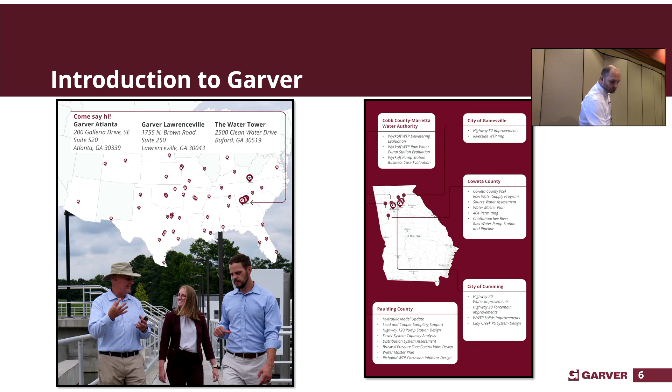First, we're going to talk a little bit about how Metro Atlanta developed relative to water. We're just going to talk about the water things. I got a lot of stories.

Most of this stuff comes from Franklin Garrett's Atlanta and Environs book. Anybody here familiar with that book? Franklin Garrett was a historian for a really, really long time in Atlanta. The books are long and crazy, but during COVID, UGA opened up their entire library so you could download things. So what I did is I downloaded both volumes of the book, put it inside of a PDF, and then did control find for everything related to water, wastewater, and supply, and went through and chronicled the different history of what was going on inside of Atlanta.

Additionally, there's another book floating around here that I've left sitting somewhere, called Thirsty City. I wanted to share it. I do not have an actual physical copy of Atlanta and Environs because it's huge and expensive, but I do have this. This is Thirsty City. I would also recommend this book. Pretty good. So I'm taking a lot of the history out of those two books.

These are not things that I went and read the archives for myself. So I just want to be really clear that all I'm doing is presenting information that I think is interesting, that might give you a little bit more context the next time you're watching the news about what's going on in the city or in the North Georgia area when it's related to water.

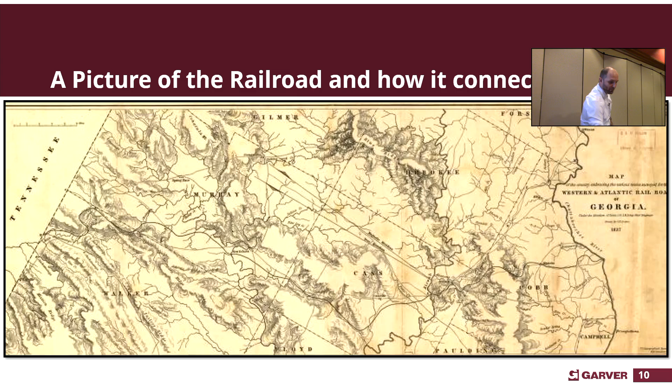You can't see this at all on this map, but this is actually the original Western and Atlantic Railroad, and here is Atlanta on the Chattahoochee, where they were going to a ferry location, a common ferry location on the Chattahoochee. Up there is actually Tennessee. And there's a whole bunch of counties I was going to show you as well.

So, jumping into Atlanta and its environs, a chronicle of its people and events. It was published in 1954, and then volume 2 was published in 1969.

In the 1850s, Atlanta's water source was artesian wells, located adjacent to Five Points — not Little Five Points, but Five Points downtown. And what is an artesian well? It means you could shove a pipe in the ground and the water will go upward, because there's pressure underneath the ground that forces the water up.

That's a great solution for maybe 100,000 people. I don't know the safe yield, but it sure isn't a solution for 1 million people. So it was only a short period of time before they started thinking about it.

So between 1850 and 1875, there was a lot of conversation inside Atlanta City Hall about privatization. Sound familiar? We're going to talk a little bit about what happened with Bill Campbell and all the stuff with privatization in Atlanta. These things rhyme and repeat.

They fought for many years about how it was going to work. Should they do the Atlanta Works? There was actually a canal company established that was going to try to dredge and bring in water from different areas because they knew it was a water issue. Eventually, the city council came together and decided there was going to be a new water source, and they were going to do it on the South River.

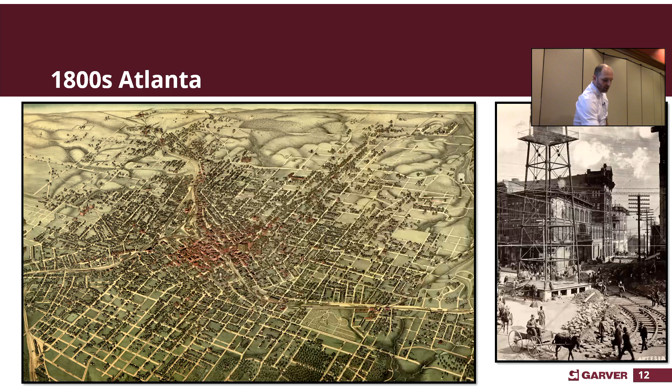Inside Franklin Garrett's book, he lists that Atlanta Waterworks' headquarters was actually located at South River Water Reclamation Facility - that was the original location. There's definitely conflicting reports out there about where the original one was. Some people have reported it's Hemphill, but Atlanta Waterworks was established prior to Hemphill, so I don't know.

But I do know this - I was there starting up the digesters while I was at South River, and this is the original house that the plant manager for South River actually lived in. Back in the day, that's where the plant managers would actually live, at the places they worked.

In fact, Clayton County still has original houses near one of their plants, and they still rent those out to their operators who operate the plants, because they have to be available.

I'll stop right here to say, if you don't know too much about water and wastewater - I love our linemen that get up and fix the power when it goes out, but you probably haven't thought about the water operators that deliver your clean water whenever things go bad, and the wastewater operators that keep our rivers clean. We do a lot to recognize our operators, but two Christmases ago when we had that freeze, those ladies and gentlemen worked basically from Christmas past New Year's, finding all the breaks and trying to keep your water online so you could enjoy your holiday season.

They really do love the fact that you don't think about your water. That's the kind of people our water and wastewater operators are, and it's a really special thing. We should be celebrating them more as a society, but that's okay.

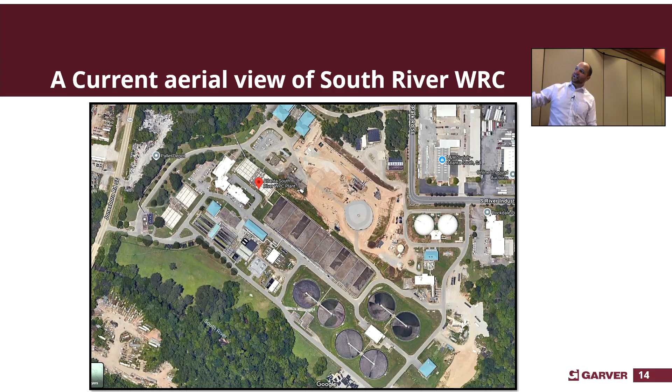This is that original building they lived in, and unfortunately it's been demolished, so you can't see it too well here. But this is actually a new primary clarifier being constructed for the wastewater treatment facility at South River, and it actually recently got demolished. So this history goes away if we don't make an effort to preserve it.

So in this area right over here, you're seeing Druid Hills, right? And what's in Druid Hills? What famous university? Does anybody know who was on the board for Emory University when it was established, who has a famous last name in Atlanta? Asa Candler - his son was on the board when they established Emory University.

Asa Candler's family was all living in the Druid Hills area, which is near the headwaters of Peachtree Creek, a very famous area. Another fun story about Atlanta - they had an exotic zoo down by the bottom, if you've ever been in the atrium area of Emory, and they moved all those animals to Grant Park, which actually became Zoo Atlanta.

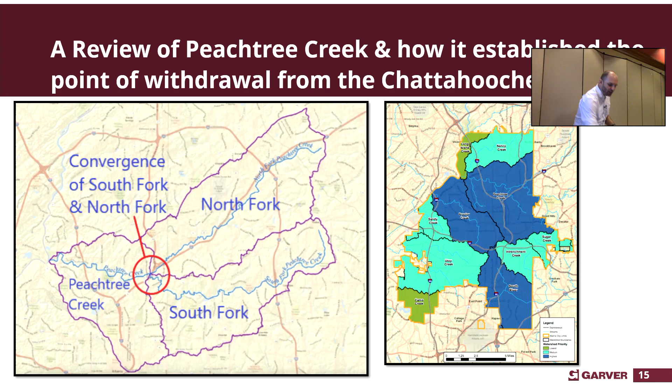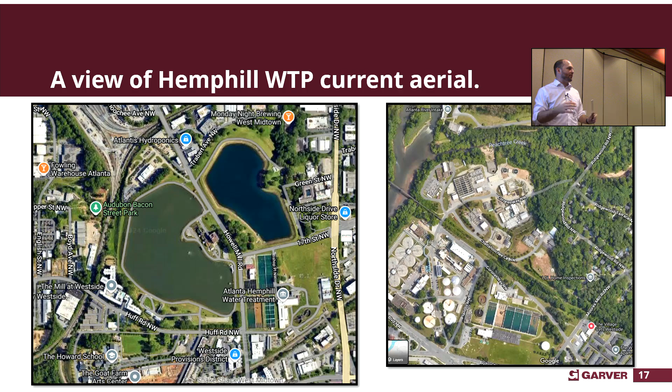This is a massive complex full of all kinds of treatment. So this right here is the wastewater treatment plant. You've got the water treatment plant here. This is the Chattahoochee water treatment plant. You have Cobb County assets. You have City of Atlanta assets. This is just a really important spot that has established over the last 100 years for a lot of water-related items inside of the City of Atlanta.

So continuing on with Atlanta and its environs, in the early 1900s, wastewater ditches to Imhoff tanks. So we talk about this a lot, and it still is a real thing today as we go out into new areas and develop. It's called the water sewer lag.

Anybody heard of that? Okay, water is revenue. So the government has a direct incentive to add customers on the water side, right? You have a direct incentive to build infrastructure to deliver water because those are customers. Customers are great because they pay bills, but they're also really important for bonding. So if you have customers that you can spread the cost of any capital projects or things like that, it's very important for bonding.

You have to think of governments from a funding standpoint different than a person. You don't have to, actually. You can think whatever you want to think. I think that you should think of government's finances different than a person. So when I hear somebody say balance the budget, well, sorry, governments don't die. Well, they do eventually, but hopefully thousands of years later.

Guess what they also do? They don't retire. They don't have to prepare for retirement. They need debt. They need debt to operate, to keep the system moving, because if you built the Chattahoochee pump station right now -- that they built in 1953 for Cobb County Marietta Water Authority, which was $2 million -- it would be $70 million. So with inflation and things moving, you must keep investing in infrastructure along the way, or you're going to end yourself in problems just like what we're talking about.

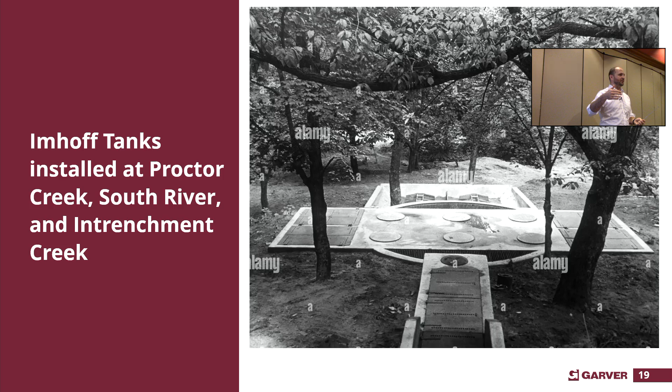This is a view of an Imhoff tank - not one in the city of Atlanta, but it gives you a sense of what they would have looked like below grade. They had Imhoff tanks at Proctor Creek, which you've probably heard of on the west side of Atlanta, very impacted by impervious surface; at South River, which we talked about a minute ago; and at Intrenchment Creek. South River and Intrenchment Creek ended up becoming combined sewer overflow locations, or CSOs, and Intrenchment Creek has recently been upgraded further, sending the wastewater to different areas, but I'll talk about that in a minute.

There are no known pictures of the street party, but in 1918 they had a party on Peachtree. They hung flags 100 feet in the air, all down Peachtree from Auburn Avenue to 12th, something around there, and had a party on Peachtree. They turned on the pumps and shot water up in the air, celebrating that Atlanta would never burn down again, in a year and a half's time. Once they had that capacity, the water system started spreading everywhere throughout the city of Atlanta in a major way.

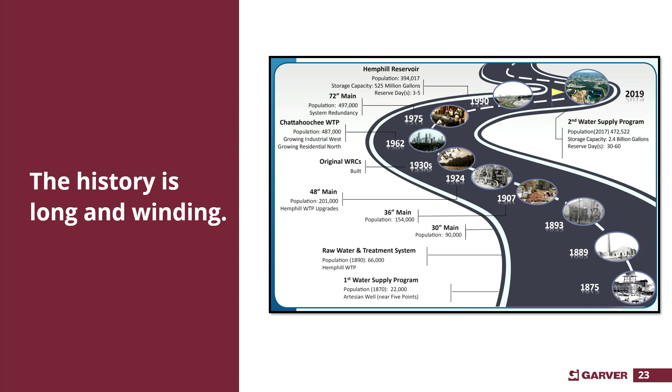South River, the headwaters of which are actually located under the Delta airport right now — there's a whole podcast called Finding the Flint that is spectacular, and there's a whole bunch of people doing a lot of work inside the city related to that.

One of the fun stories I'll tell about interbasin transfer and that original era: there was a plant put down at the airport called the Flint wastewater treatment plant, and it expanded into the 1960s. It had Venturi pumps.

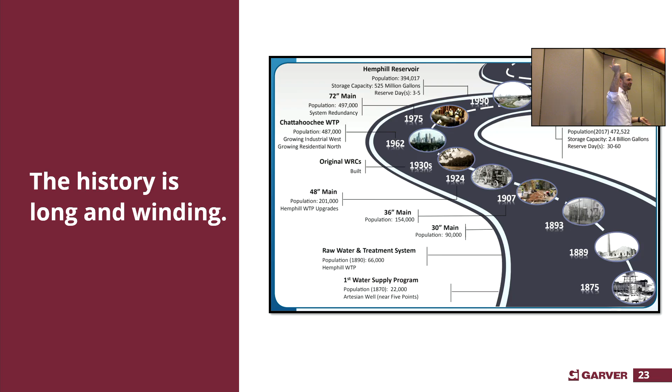Anybody familiar with what a Venturi is, from Bernoulli's equation? If flow is moving fast, the pressure goes down — I tried to trick y'all. One of the cool things about a Venturi tube is it recovers its head, it recovers its pressure loss. When you neck down, the outer neck is designed to have the least amount of head loss possible. What that also means is if you start a Venturi, it's a self-priming thing and will continue. So they actually had original Venturi pumps all over this wastewater treatment plant, because they didn't want much mechanical equipment inside their plants.

Who's the number one water user in the country?

The power industry - who's the number one power user in the country? The water industry. Our blowers at wastewater treatment facilities, the pumps for water, are just sucking power all the time. That's why most of them are generally public good utilities, because they're inextricably connected in a major way.

That's why we work so closely with them, with our intakes and all those other things. But when interbasin transfer came along, they had to shut that entire wastewater treatment plant down in the 1970s. And those Venturi pumps I was talking about work great unless it's wastewater. Those things would mess up all the time. There's all kinds of stories about it - it just didn't really work right.

Engineers having great ideas on paper, right? A little bit harder to apply. Now there's a force main that sends the water all the way up to South River, and I'll explain that on the next one.

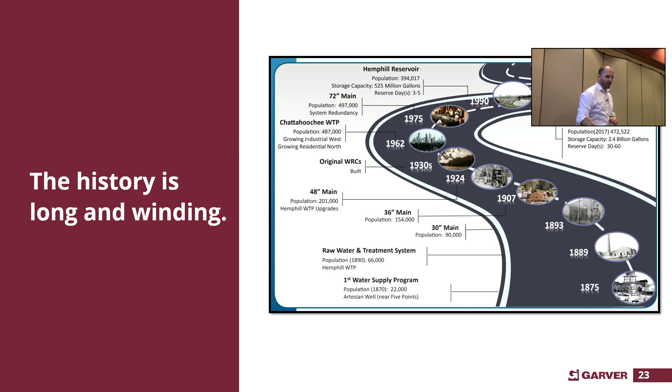We're going to talk a little bit more at the end about some of the challenges going on, but that's the big three - those three wastewater treatment plants - and a lot of the issues they're dealing with on the wastewater side of things. Because we're going to talk about the water, but the wastewater situation is not an insignificant thing that the city of Atlanta faces right now.

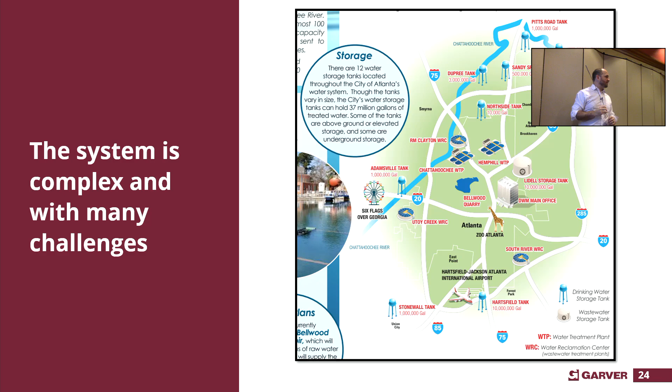This is the Hemphill Water Treatment Plant. Make sure I'm circling the right thing - I'm sorry, that is the Hemphill Water Treatment Plant. And so that is that pump station I was talking about that's really supplying most of Atlanta.

Well, when this main break occurred, it occurred in the early morning hours of that Friday, and they initially reported that it was at the intersection of three major transmission mains. Al Wiggins is the acting commissioner - I think he may be the official commissioner now. There's been a little bit of transition, but Mikita Browning was the previous commissioner that had left earlier this year.

So he was relatively new in the job, gets on the news, and they had made a decision that they were not going to shut everything down until 5 p.m. that afternoon, to give people time to plan. At the time, they didn't know how long the break or the repair was going to be, but they knew it was a significant situation in a significant area, and they told people there may be a boil water advisory.

I have the videos, but we're running out of time, so I don't want to go into every single one of them. But I think it's important.

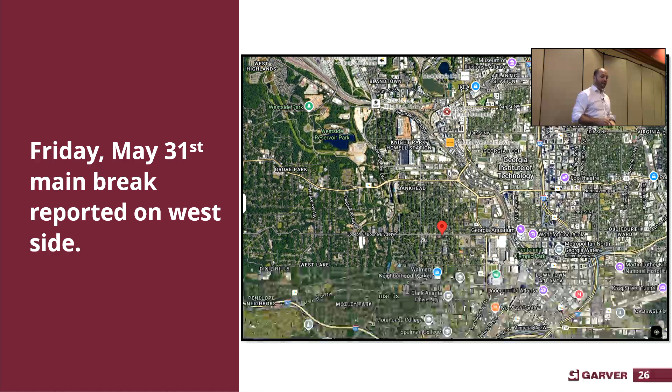So they started the repairs at 5 o'clock and proceeded through the night. In that time, there was another break on the west side. Sorry, my bad, let me back up. The situation was assessed prior to the repair, at the intersection of 3 major trunk lines that were 80 plus years old.

This was the original boil water impacted area, which was actually put out later. They did not put that out at the time of the break. Crews were mobilized. There were actually some crews sent home according to the interviews, and they prepared for 5 o'clock and then worked all overnight to assess the situation. Remember, they had to turn it off to even get in and see what happened before they could do anything.

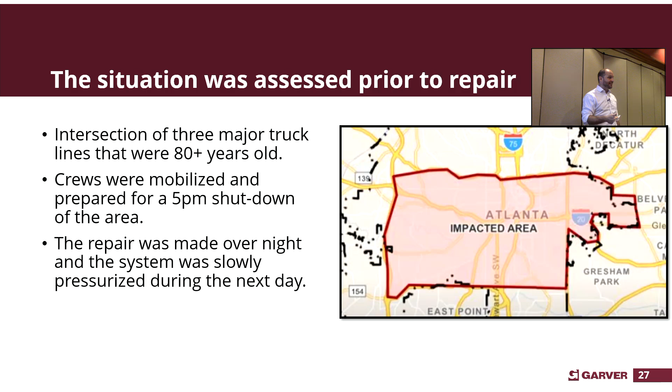Then the repair was made overnight, and the next day, Saturday morning, they started to repressurize the system in the area. But the public isn't so kind. That's not how things work for us sometimes as engineers.

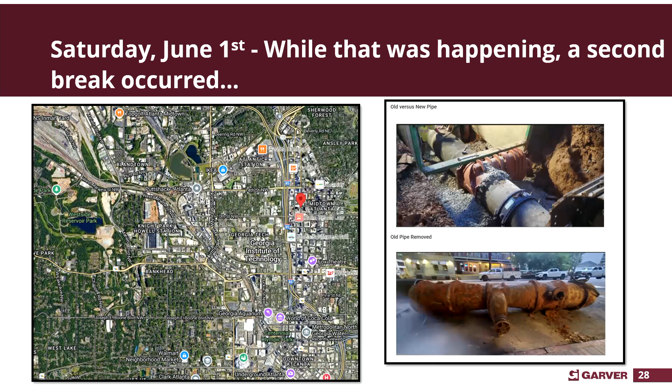So on Saturday, June 1st, while that was happening, a second break occurred overnight, right here with the red dot in the heart of Midtown. So this break happened and they repaired it. Unfortunately, another break happened, and as far as the news was concerned, it was all one huge compounding disaster.

This is actually a picture they posted later of the pipe that was pulled from the ground. It was over 80 years old. I doubt very seriously that gate valve was ever going to open — that's called a gate valve. And this is the repair of the area once completed.

Do you think it's possible that the lack of pressure and then repressurization may have contributed to this? Absolutely. You can't say definitely that it did, but you can say what happens when a system is pressurized and depressurized. I worked on the Richland Creek supply program in Paulding, where they switched from Cobb County, Marietta to Paulding water. We did a whole bunch of work on how the water was going to change directions, so we knew the most likely places for it to break. The interesting thing is when you pressurize and repressurize, the pipe moves in an opposite direction than it's moved for the last 80 years.

And that change of direction can cause a little bit of space next to the pipe, and what restrains a pipe in these old systems is the ground. We have new restrained joint fittings and special materials now — they didn't have that 80 years ago. They made a bell, shoved the pipe in, and put it under the ground, and it held the water. A lot of times they actually poured lead to seal it, and there are reports that's what they did from the original Chattahoochee intake to Hemphill. So it absolutely could have contributed, but you couldn't tell for certain.

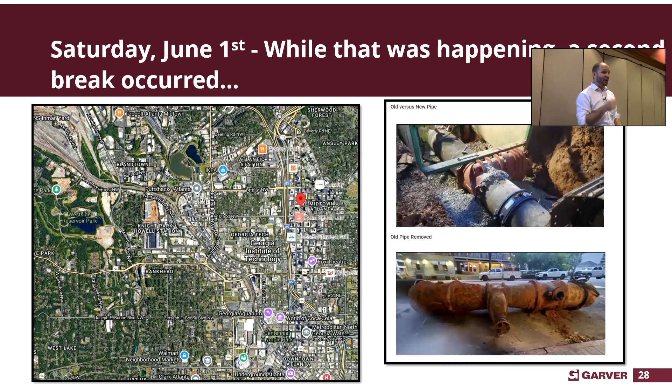And in that time period, they had other breaks. The City of Atlanta's got breaks all the time — this is a 100-plus-year-old system. Breaks are happening continually. They have a lot of people working for the City of Atlanta too; a lot of people don't realize how big that organization truly is, and how many things there are to handle.

Then moving into Sunday, June 2nd, they started draining the lines in this area. They got this repair done relatively quickly, from what I know, but this area challenged them. From all the reports they put out, the issue was they couldn't isolate it, because where this break happened there was a valve right there, and they couldn't get it isolated. So they spent a lot of time around the area trying to get it isolated on Sunday.

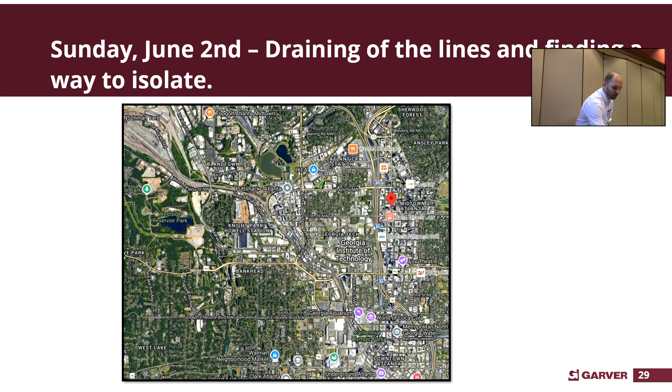By Monday morning, this is the actual zone for the boil water advisory. And this is a picture of the original boil water advisory I showed you, covering the multiple trunk lines — this is how much smaller it was on the second one. But again, news doesn't care, right? This is just selling papers at this point.

Everybody's paying attention these days in 2024. I'm telling you, my great-grandmother just came back to live with my mom and dad. She'll listen to anybody on YouTube, on the internet, the news and things. So I'm telling you, my generation in 2024, we don't trust nothing. You got to tell us, we got to see it from seven different sources. You really got to take that mentality. A lot of people in this room know this - we're professional engineers, this is what we do. Our stuff just gets turned on us from time to time.

But this was the case. They had reduced this down and they were attacking that break, and they ended up finding out that it was a part they didn't have, because it was a big older part. They actually had to have it brought in from Alabama. I think it was Birmingham Waterworks Board, because they also have big infrastructure like Atlanta does. They had police escort to bring that part back into Atlanta, and then Atlanta PD picked it up right when they hit their precinct to bring that thing in.

It gives me chills - I'm a water engineer through my core, and that's what this is. This is public health and the ability for people to do the things they need to do on the daily without thinking about their water. And if for a moment there, people recognized again how special that is, and really how fast it can be taken away, that's the other side.

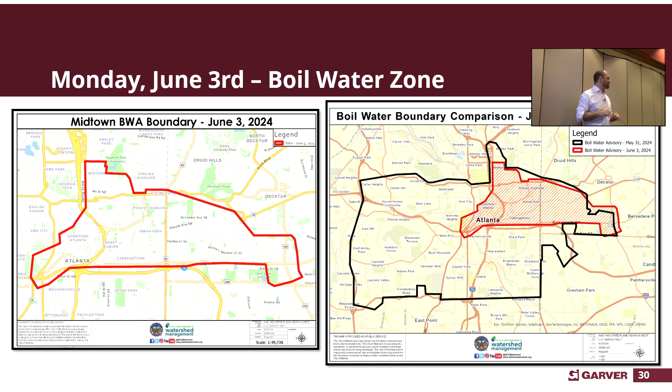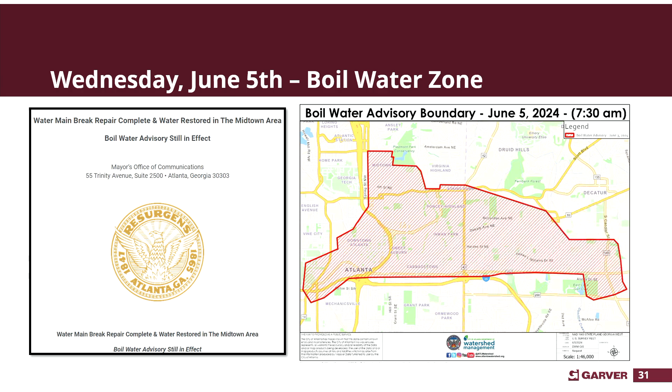Maybe not exactly what you thought you were gonna hear from the presentation today. I'm like, hey, it's cool that this happened - not exactly. City of Atlanta needs some things to work on for sure, but with all this, I just like to be honest about it.

So this is Wednesday as it's brought in - you have the same boil water zone. At this point they had gotten really good at communicating out to the public what's happening, while the news is eating it up and trying to blame it on somebody. But on Thursday, June 6th, the boil water was restored. City of Atlanta has since engaged with the U.S. Army Corps of Engineers.

I'm going to talk about my own opinions here - this is not something I know, but here's what I think is happening. They do assessments in Atlanta like all the time, it's just part of being a system that big. I think they do it too much, quite honestly. I'm a 'you looked at it, build it' kind of person. We got to replace the assets and quit analyzing it till the cows come home. There's a point that's good enough, and then replace it.

John's over here, I talk about this at Garver all the time - I don't want to hear 'okay, you analyze it, replace it.' That's fine, but that's the problem affecting our country right now, our state and our communities: we're over analyzing because we're scared to death to get sued. We gotta get the stuff fixed and revitalized in the ground, above ground, and everything else. It's deteriorating every day, and we gotta quit mulling it over.

So the U.S. Army Corps of Engineers was brought in. The last I heard was a $2 million contract to assess again. But here's the key of that - there's a lot of conversation going on right now in Georgia around where federal dollars are being spent.

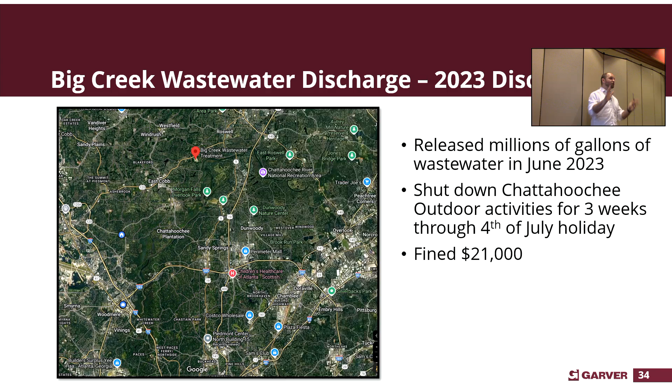So that was just last year in the summer. Then the Chattahoochee River Keeper discovered and documented a wastewater discharge from R.M. Clayton. R.M. Clayton is located right here - Big Creek was up in this area along the Chattahoochee River, and it flows that way through the city.

They informed the City of Atlanta of their monitoring results, and then in July of 2024 issued an intent to sue, which is required under the Clean Water Act, providing a 60-day notice for that intent to sue.

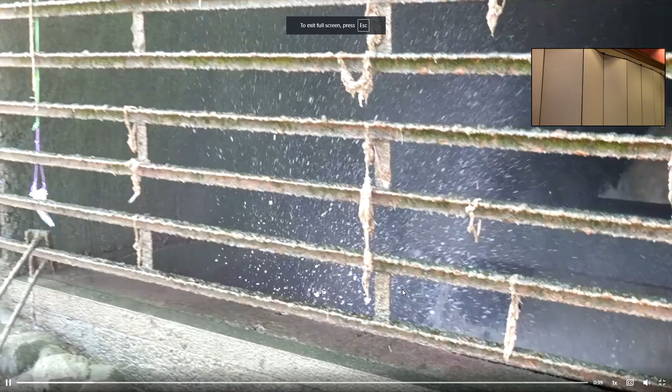This is the executive director of the Chattahoochee River Keeper. They have 300 people who volunteer to take samples, almost weekly or every single day. This is them at that discharge, documenting what they're seeing, right now just downstream of Atlanta Road, where RM... They have a really cool jet boat that allows them to get around the Chattahoochee. It actually goes back to Shirley Franklin, and there's a recent documentary, but look at this - 80 million gallons per day.

Unfortunately, we've had a lack of communication and cooperation from the city, and because of that, we just filed a lawsuit against the city of Atlanta, an intent to sue, holding them accountable. I included a picture of what it looked like.

That's coming out into the Chattahoochee River at the time they were taking samples. This wastewater treatment facility reportedly is releasing 40 to 60 MGD, permitted up to 100 million gallons a day, into the Chattahoochee. It's not that big of a river for that kind of discharge.

The Chattahoochee River Keeper has documented reductions in dissolved oxygen downstream. It's a big deal, and it's not okay that this is happening in 2024. I'm trying to get the word out, but that could be a reason why water rates maybe should go up in Atlanta, to fix that. So getting the funding right is a really great path forward.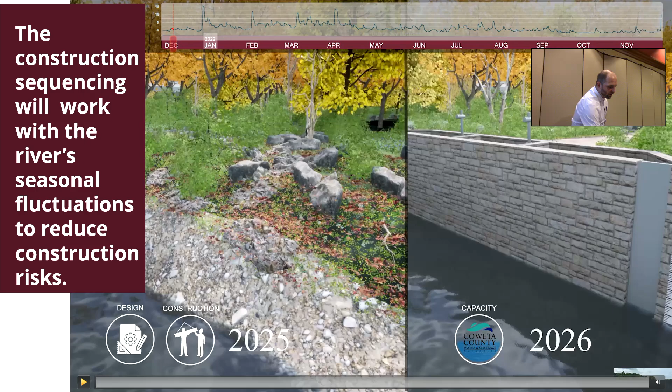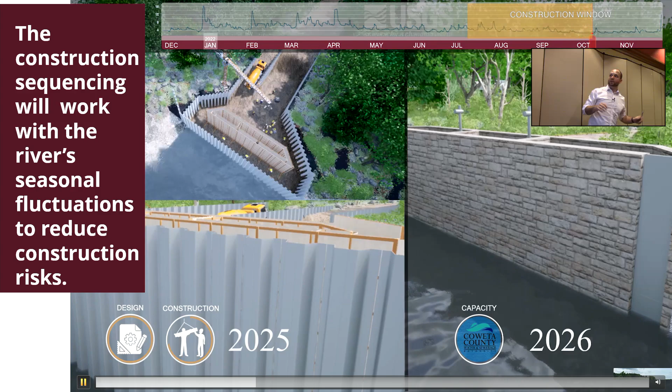Inside the Chattahoochee River, you can see it's much more flat during this period. So we actually designed the project during the wet season, and now we're having it constructed during the dry season. They're actually building this new intake right now. It'll supply 27 million gallons per day to the Coweta County Water and Sewerage Authority, supplying the region southwest of Atlanta. You can see them constructing there, and we're going to zoom out in a second.

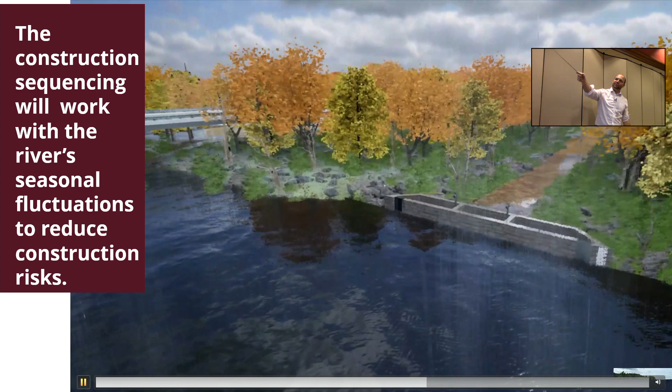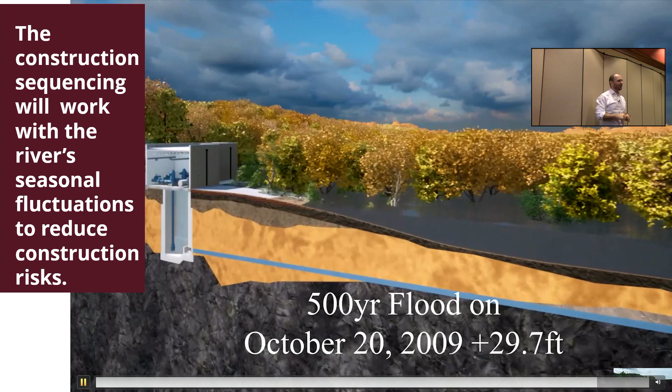We actually modeled the 2009 flood that occurred - you can see the water lapping the bridge in the distance there. We put the pump station way back off the river so that during that flood stage, we can still provide water to the Coweta County Water and Sewerage Authority. I just thought it was interesting, one of those neat things we modeled that most Georgians really appreciate seeing, the 2009 flood.

So there's a huge ability to regulate the water levels and water flow in the Chattahoochee with the Buford Dam, and I hike often in the East Palisades and so forth.

During the week, the river has been extraordinarily low. Would this construction be downstream of this water? You want to restate the question to the mic? Okay, you got it. Is this on? Check 2, 3. I've noticed that the Chattahoochee River during the week has extraordinarily low water levels, all the shoals are out of the water, there's very minimal flow. Could that have something to do with this downstream water intake construction?

Are they low for that? I'll tell you this, I've worked on multiple construction projects on rivers, and we would have had a lot more success if the Corps gave two craps what we were doing. The Corps does what the Corps wants to do - they have power generation schedules and put things out on flow, so it has nothing to do with that intake. If it did, I would actually be the one advocating to keep it low for a little bit so we could decrease total construction costs for the ratepayers of Coweta County Water and Sewerage Authority.

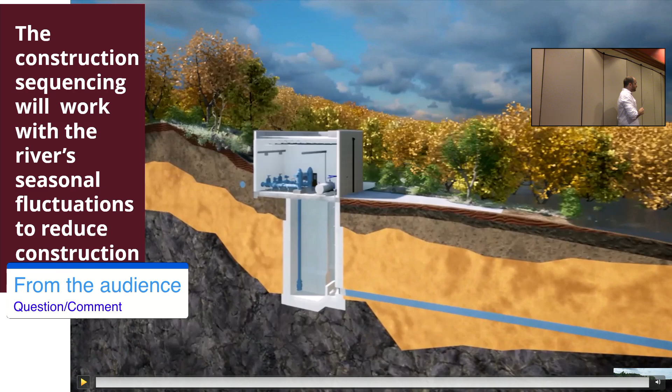We had a lot of rain like a week or two ago, 5 or 6 inches of rain. For those that watch the water and how rivers work, Georgia has localized watersheds, a lot of them. You could get a lot of water up in North Georgia around Helen, and that's a pretty small watershed that goes into Lanier, but it still can contribute. The dam usually holds that back, but then you can get a ton of water in Atlanta south of Buford Dam, and there's no way to stop it, it's just going to roll, but it'll roll pretty quick. So there's a bunch of stuff on it.

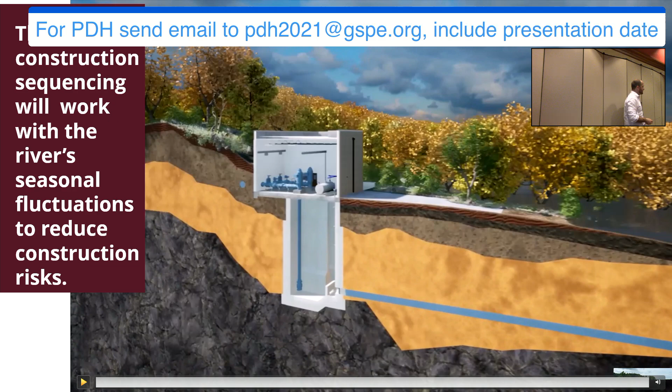I wish I understood it perfectly. I've got our team working on it to really understand the different rain amounts and how it affects the river elevation, and honestly, to give a water quality perspective to the authority as they go to treat this new water. But yeah, it's climate dependent mostly, especially with Lanier, because Lanier stays more level.

Allatoona is actually way more regulated on floods because of the Oostanaula coming in at Rome. So they hold back Allatoona a lot of times to let the Oostanaula roll through to the Coosa into Alabama, to not flood Rome. Fun fact: before Allatoona Dam was constructed, Cartersville flooded all the time. Cartersville hasn't flooded since Allatoona Dam was constructed. Or at least not that I know of. It's on YouTube.

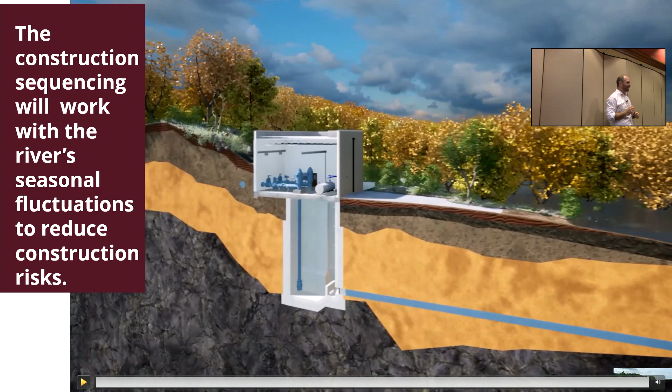Any other questions related to this? Yeah, I'm done. Oh, sorry, last slide. Thank you.

This guy did not present. He's gonna be mad if his name's on there and this YouTube goes viral. Andy had no part in this presentation.

What are they doing to clean that mess up? Great question, you gotta ask it to them. Oh, you want me to? He asked, what are they doing to clean that mess up? So a lot, actually. I should have put that probably more in the presentation.

The story is that when the Riverkeeper came in to RM Clayton, the secondary clarifiers were all backed up. The secondary clarifiers, basically the clean water goes over the top and then goes to the last treatment step, or disinfection, and the last bit of solids accumulate at the bottom. When they came on site, they were all full and non-operational.

According to the Riverkeeper's posting, they alleged it was due to some heavy rains earlier in the year, but they don't think that's 100% likely. The Riverkeeper has also said that the people a part of this process suing RM Clayton are actually previous operators of RM Clayton, who are as upset as anybody that this has gotten to the state it has.